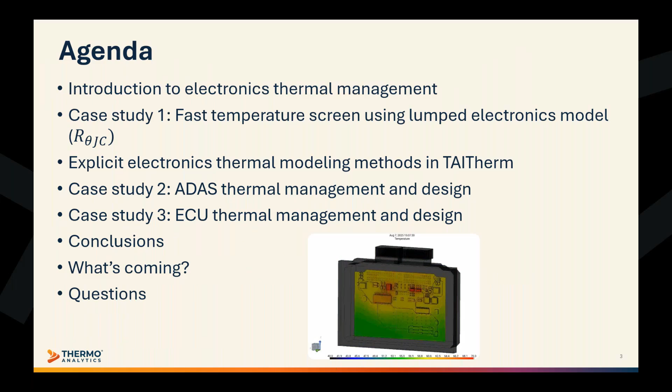So electronics thermal management is critical for a variety of applications, including aerospace, medical devices, commercial devices. But for this webinar, we're going to focus on the automotive applications. And as is often the case, the need for this electronics thermal management and analysis is driven by regulation. And for automotive applications, ISO 26262 is the most critical. ISO 26262 is the functional safety compliance that requires demonstrating that critical ECUs and sensors remain within validated thermal limits, even in extreme environments.

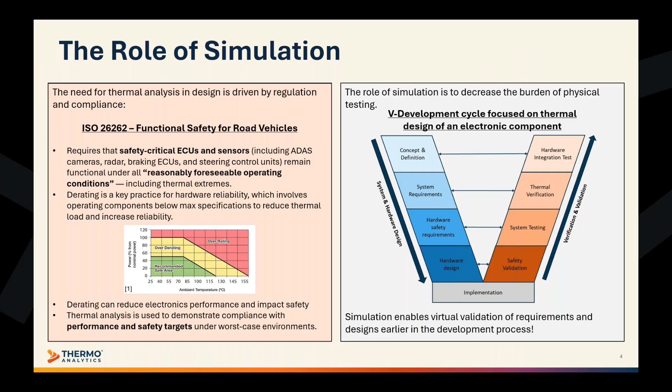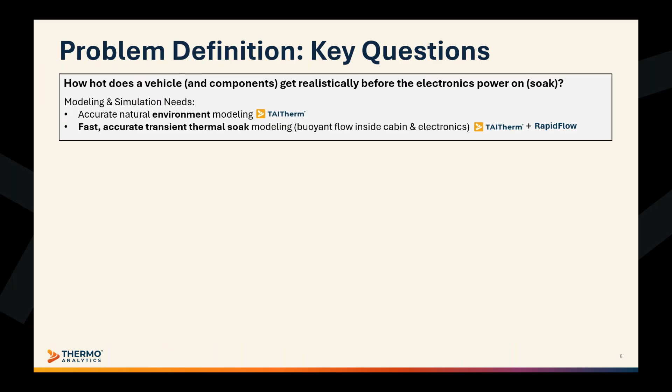And we also want to see how the electronic components heat up during the operation after the vehicle has been turned on and they begin pulling power and producing heat. So these modeling methods include modeling the component heat dissipation over time as they draw power, modeling any heating through the PCB traces, which can be done with Joule heating within TAITherm, and fast, accurate, transient thermal and convection modeling inside the cabin, the HVAC system, and the electronics themselves, and fast, accurate, transient prediction of component temperatures and their derating behavior, which can be done in TAITherm and RapidFlow.

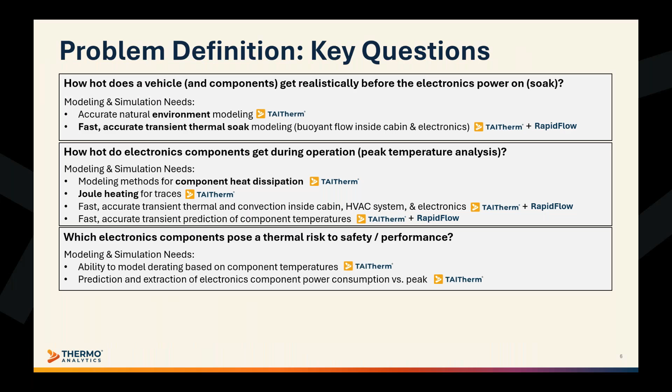We also want to see which of these electronic components pose a thermal risk to safety and performance. So this includes being able to model the derating behavior based on the component temperatures. So how is the power draw being decreased at these high temperatures for these components once they've reached their derating threshold? And then the prediction and extraction of the actual power consumption of the components at those high temperatures versus what they should be pulling in a normal scenario.

And finally, what mitigation strategies can improve the design? So this includes the ability to run quickly with RapidFlow and explore multiple design iterations. We'll see that RapidFlow runs very quickly, which is advantageous for running many quick design iterations. So these are some of the key questions that we're looking to answer, and these are some of the modeling simulation needs and what we can do with them.

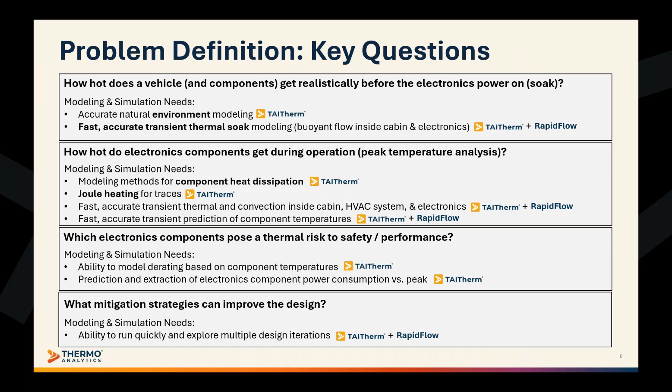So a key enabling technology for this workflow, as mentioned on the previous slide, is RapidFlow. RapidFlow is a transient flow solver completely integrated into TAITherm, and it was released officially last year within TAITherm 2024.2. And it's not necessarily meant as a direct replacement to CFD, rather as a complementary tool to enable fast, transient thermal simulations earlier in the product design process.

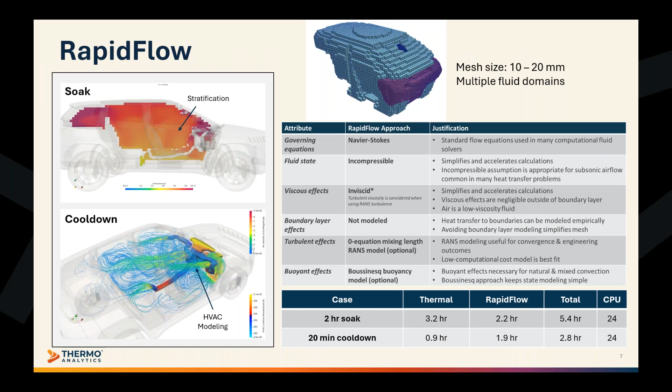So TAITherm has been a strong solution for a long time for thermal soak using fluid nodes. And in this approach, one can prescribe some level of discretization manually, allowing for some simple temperature stratification in the cabin. So you could have multiple fluid nodes, like one at the bottom, one at the top, to get the temperature difference between them. And this approach is the fastest with an estimated runtime of just over 3 hours for this 2-hour soak example. But RapidFlow enables a significant increase in the solution accuracy, predicting temperature stratification, while only increasing the runtime to just a little over 5 hours on the 24 CPUs.

And we can also enable RapidFlow within the ECU and camera components themselves to accurately consider the internal convection. Of course, one could also choose to run the soak with conventional CFD, which generally takes on the order of days rather than a few hours. So there's a few different approaches, but for this one, we're using TAITherm and RapidFlow together.

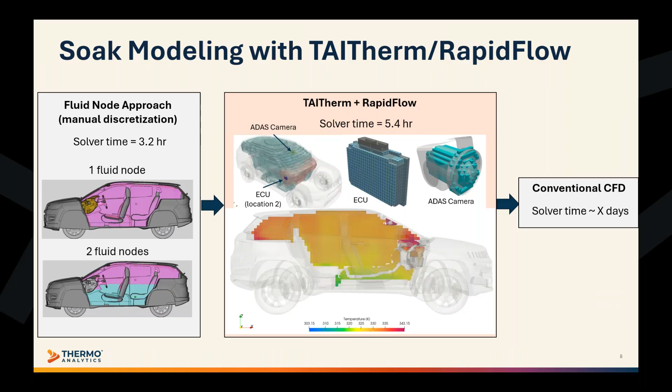For the cooldown, the cabin airflow is modeled using the RapidFlow solver. Cabin air enters through the HVAC vent interfaces and exits the cabin fluid domain through the recirc interface on the HVAC system. The HVAC system flow is modeled using fluid streams just for efficiency, and the RapidFlow air temperature exiting the cabin domain feeds the HVAC fluid stream temperature.

And a PID controller in the evaporator controls the heat rate in the evaporator to target 22 degrees Celsius in the cabin. And the fluid streams through the ductwork then feed the RapidFlow vent temperature inputs. I'll talk more about this at the end, but I'll tease now that local mesh refinement is coming next year for RapidFlow, so a uniform Cartesian grid won't be required. So very soon, resolving the flow through the HVAC system using RapidFlow will be very efficient, and we won't need the fluid streams through the HVAC system.

At this point, I want to dive right into our first case study, which looks at how we can use the component junction to case thermal resistance, the R theta JC, to perform a fast temperature screen and quickly evaluate which electronics modules in the current design iteration pose a performance and safety risk. So the real value here is it provides a means to use the manufacturer data sheets only to estimate the junction temperature from the case temperature.

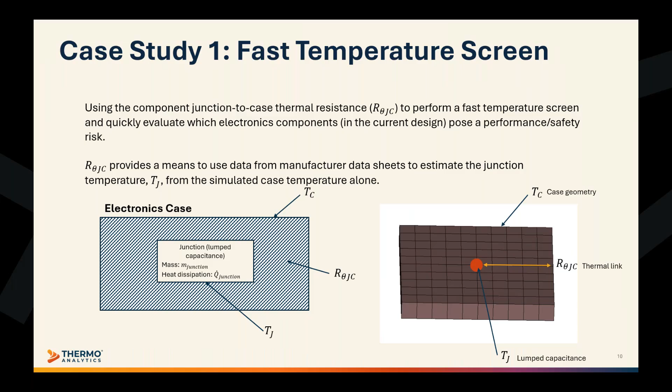So after the soak, the driver re-enters the vehicle and initiates a 20-minute cooldown. During the soak, the safety critical electronics modules and the cabin are warming significantly. It's very hot in this car. And then during the cooldown, these components are powering on, adding additional heat through their power dissipation.

In these case studies, we're interested in an ECU, the electronics control unit, that performs some safety critical operation, located somewhere underneath the dash, and an ADAS camera mounted near the rear view mirror. These components are cooled passively by the HVAC system, so no active cooling. And these components pose the highest risk in the first few minutes directly after powering on. While the cabin air is still cooling down, it might not be able to sufficiently moderate these component temperatures, especially the ADAS camera, as it's getting really, really hot since it's in direct solar radiation.

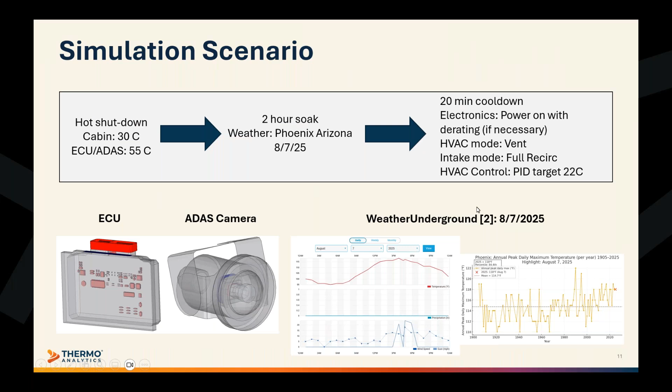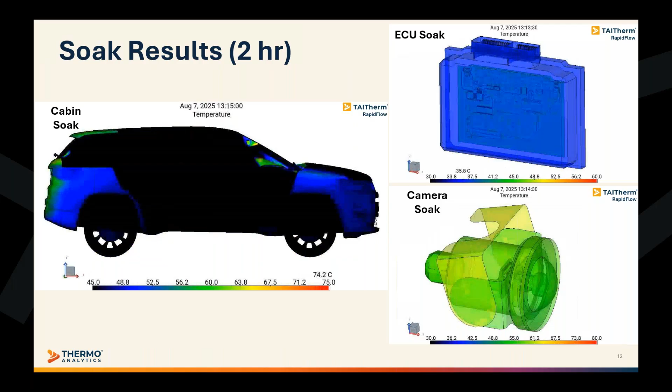In vent mode, the dash vents and rear console vents are active, so you can see those ducts cooling down over time accordingly. And the heat rate is applied in the evaporator, so naturally the HVAC system upstream of the evaporator is much warmer than the active vent ductwork.

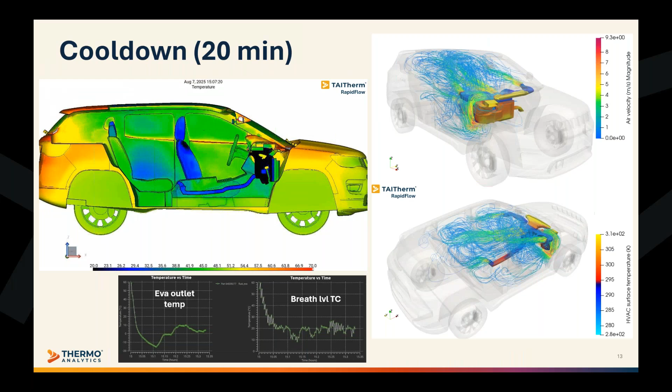And these soak and cool down results that you see are for all the cases. So for this first case with the simple fast temperature screen, to model the electronics components in a simplified way, we got to have the correct material properties.

And the density and specific heat can also be grabbed from the data sheet, or it can be estimated just based on the material of the component itself. And we can add this new material in TAITherm to assign to the electronic component part, to that junction of the component. And that way the part will have the correct thermal resistance for predicting the junction temperature of the component based on the case temperature.

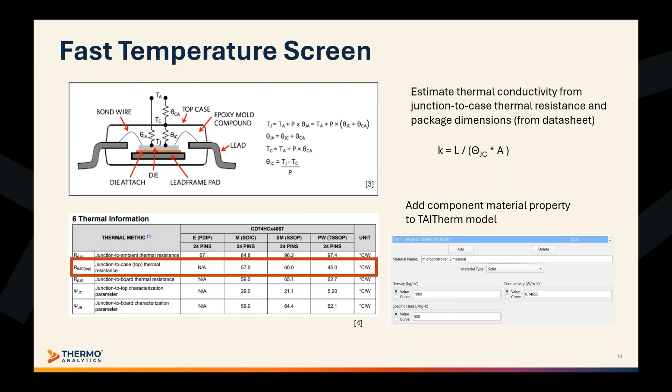And to make it simple, a lumped capacitance part can be created to model the junction of the electronic component inside of the case geometry. So we can set this to use the new material property that we just created, and we can impose heat based on the typical power consumption of the component from the data sheet. So you just add the imposed heat to the junction component.

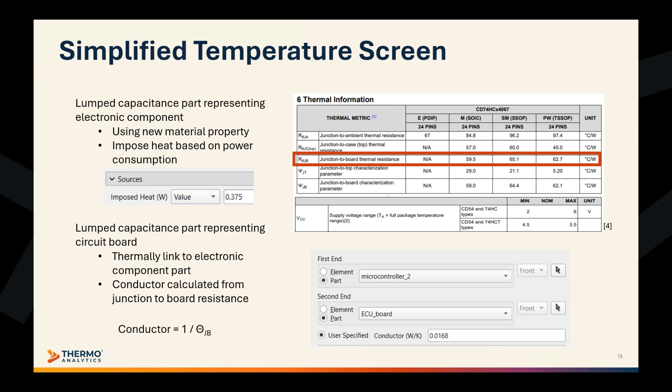And then we can connect the case of the component to the surrounding rapid flow fluid. And in this case, it's super simple. There's no derating or current curves. And the simple setup allows the simulation to run quickly, helps us get a feel for whether these components will work well for this scenario, or if they will have decreased power draw from the high temperatures. And if the initial temperature screen does show that some of them are past their derating threshold, then we can use some more complex modeling to run multiple design iterations to see what can be done.

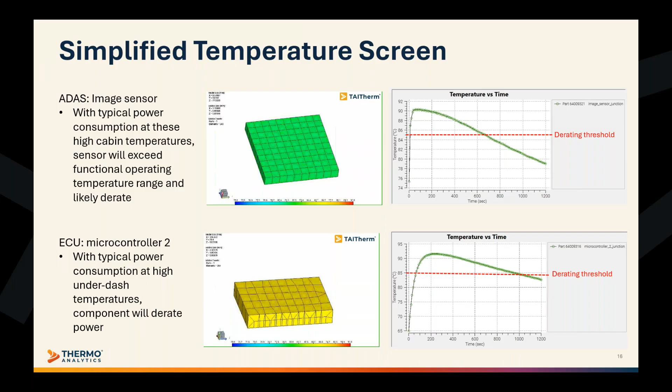So that was the first case study. We showed how we can use the simplified approaches to electronics modeling to perform fast temperature screen for the various electronics components. So once we've identified those problematic components, that image sensor, the microcontroller 2 in the ECU, then we may want to work with suppliers and internal design engineers to identify specific mitigation strategies, such as derating the components, switching out to different components, changing the position of the control units.

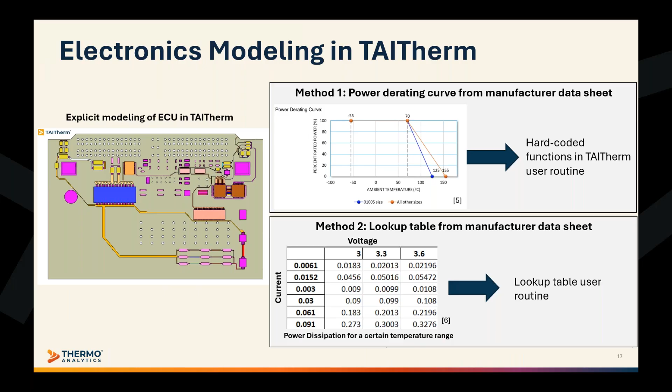And we can also use a second method with lookup tables from a manufacturer datasheet or from your own data that you have on the power dissipation of the component for a specific temperature range. And from there, a user routine can find the current and voltage being used by that component at that time, and then get the correct imposed heat to apply to that component based on also what temperature the component is at that time. So there's a few different ways to apply derating behavior to the components. But for these next cases, we are considering derating.

So we want to make sure that we get the board materials correct as well. And a standard double-sided PCB has 2 layers of conductive copper with a thin layer of solder mask covering them and a thick middle layer of an insulative substrate. So in TAITherm, we can model these layers using copper, FR4 material set to the correct thicknesses, and then a high surface emissivity of 0.9 can be set to the front and back faces to model the thin solder mask layer on the board surface.

And the electronic component material can be chosen to have the same thermal properties as specified by the manufacturer from your own data, like I showed previously in the simple case. And these material properties for the board layers or the components themselves can always be modified to match whatever material is actually being used.

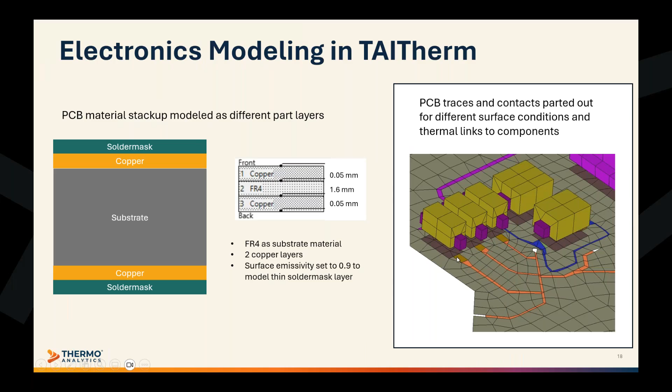And the surfaces of both the component and the board that are in contact with each other, their junctions can be parted out and set to the correct material properties, whether that's copper or lead solder, and then they can be thermally linked together to create conduction between the component and the board. And the junction to board resistance of the component can be used to calculate the conductance of the thermal link. And similarly, the copper traces on the surface of the board can be parted out and have the correct material properties, so they have the copper surface instead of a solder mask surface.

So in the second case study, we're looking at how we can use this simulation workflow for advanced driver assistance system camera design. Here we're comparing the derating performance of two image sensors, which is one of the most temperature sensitive and impactful components on the camera performance. And we saw from the simplified temperature screen that it's getting really hot, and it is past its derating threshold. So when an image sensor is thermally derated, the image sensor frame rate can be reduced, which can cause latency, delays in detection, and pedestrian recognition, which can obviously have serious safety implications.

So we're looking at performance and safety for these two image sensors, and both are low power CMOS image sensors designed for automotive applications. The first is an image sensor from ON Semi, which has an operating temperature range from -40°C to 105°C, but it's actually only functional up to 85°C. And the manufacturer recommends not using the sensors above 85°C as it reduces the image quality pretty drastically. So the typical power consumption of this device is around 290 milliwatts, depending on the ambient light conditions.

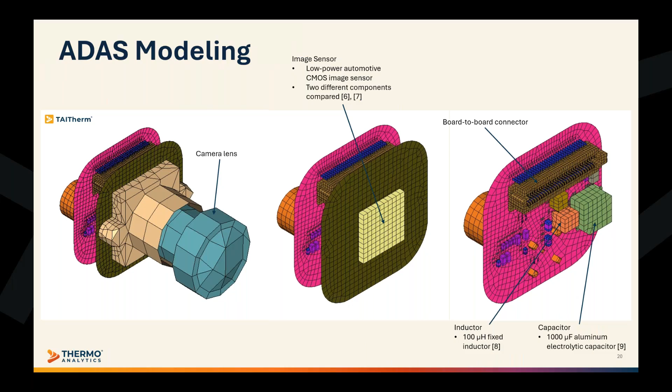So if a component reaches the derating threshold specified in the datasheet or based on the operating temperature range, then the power dissipation will decrease by a certain percentage based on how hot it is. And this model geometry doesn't have any traces, but we assume that they would have little thermal effect on the more important components.

And here we see the results of the two different image sensor components. So the components in the ADAS system start very hot. They start at around 75°C, and they heat up as the electronics begin operation. We see that both image sensors surpass their derating thresholds, which were the same, 85°C. But the second image sensor actually reached higher temperatures.

And even though that second image sensor does draw less power, it heats up more than the first image sensor because of its smaller size. And the smaller component has less surface area for the heat to dissipate through convection to the surrounding air, so it ends up holding onto the heat, and the junction temperature is about a couple degrees higher than image sensor 1.

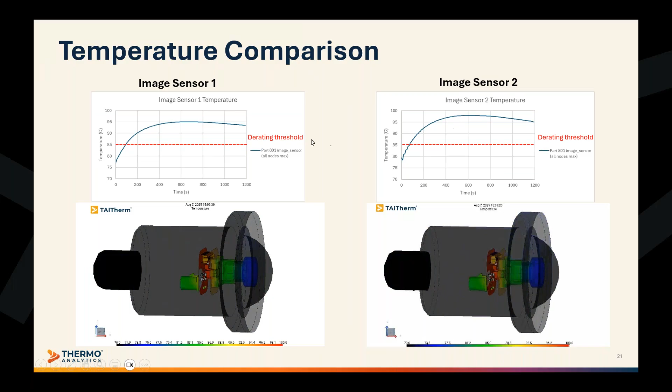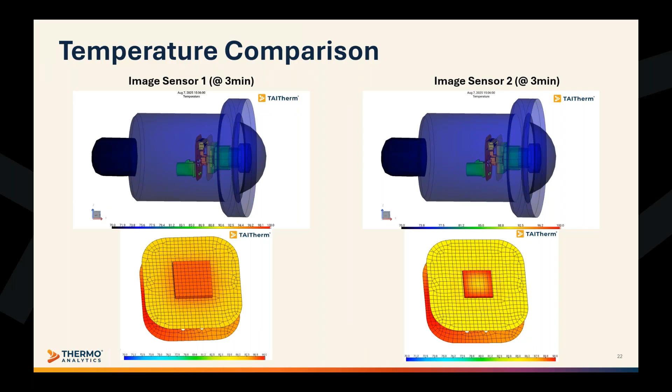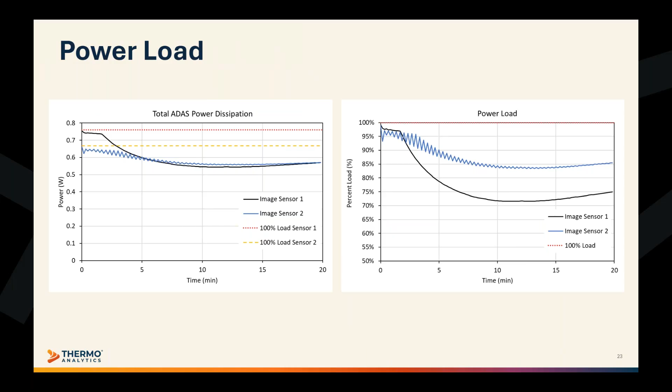So in this next case study, we're comparing the effect of the location of the ECU under the dash on thermal performance of the electronics module. We saw that some of the microcontrollers in the electronics module are at risk of derating, and we can see how that compares based on where the module is actually located under the dash. So this type of study can be done very quickly in TAITherm, requiring just a simple geometry translation in the TAITherm GUI or an external tool.

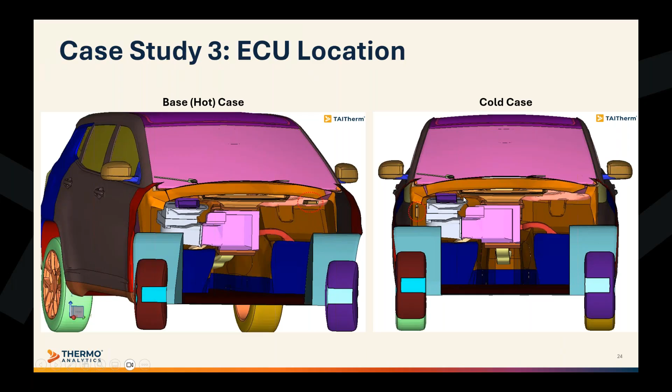And the less influential passive components, like resistors, are also modeled using a user routine based on their power dissipation and derating behavior. So again, derating was considered in this model. So if they reach their derating threshold, they'll reduce their power draw by a certain percentage. And some of those key components that we saw in the simplified temperature screen are microcontrollers 2 and 3, as they were much higher than their derating threshold temperature.

And the heat created by current moving through the PCB traces was also modeled in this case using the Joule heating feature within TAITherm. This feature uses a script that calculates the localized heating of a trace or a bus bar based on the current or voltage drop between the trace terminals. So there's different terminals connecting to the components, to the traces, and then to the next components, and that difference in voltage or the current going through it allows us to calculate the heat of those traces.

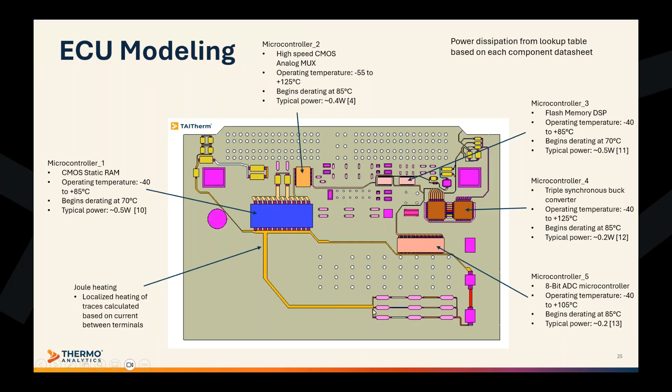So this change in location, moving it closer to the recirc intake, had a significant effect on the peak junction temperature for these microcontrollers in the ECU. So we would expect much better performance from this control unit being in a more passively cooled region.

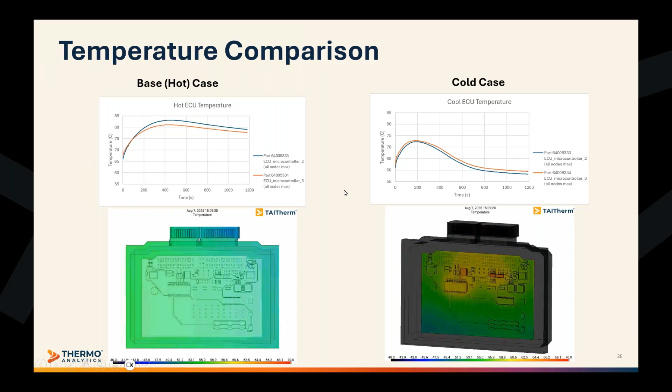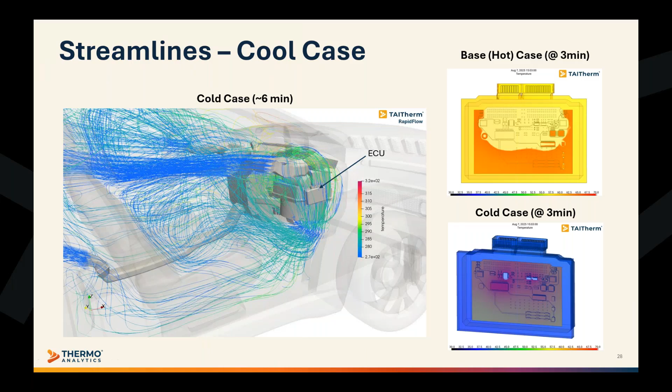And assessing the impact on safety is a bit more nuanced. It really depends on the nature and the function of the ECU. That being said, it's definitely possible that safety objectives are at risk of being compromised at this degree of derating for this ECU module, for example, due to reduced data processing speeds or latency. So pretty drastic difference between these two cases.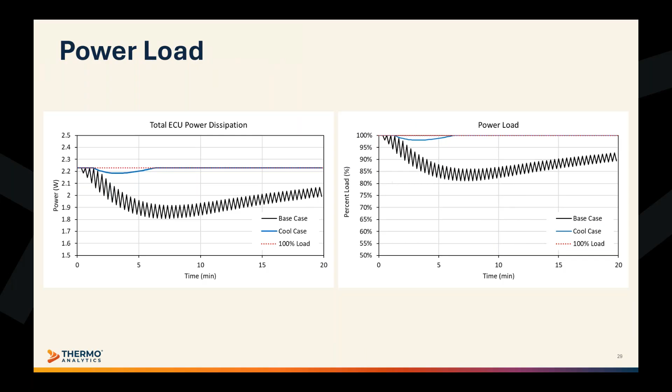So in conclusion, TAITherm and RapidFlow enable a unique simulation workflow for electronics thermal management, able to model the buoyant flow physics and the HVAC flow and cabin cooldown. We also see that a simple lumped capacitance approach using the junction to case thermal resistance from manufacturer datasheets can be used to identify which electronics may pose a performance or safety risk. And then we can model those high-risk components explicitly within TAITherm to see their heat dissipation and derating behavior.

And this proposed simulation workflow can be used to evaluate the ECU ADAS performance in detail and perform rapid design studies. The short runtime that RapidFlow allows can let you run the full soak and cooldown model in only about 6 to 7 hours. So you could run this full soak and cooldown iteration about one per day, which is pretty remarkable. So it allows for fast design iterations.

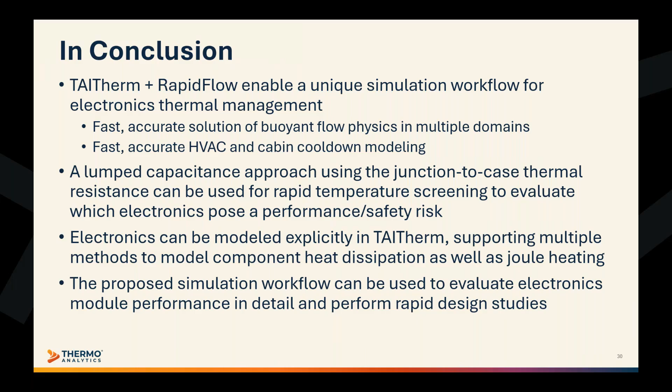And finally, I wanted to highlight some advanced features within RapidFlow. Coming soon in 2026, moisture tracking and moisture transport will be available within RapidFlow. And this can allow us to predict fogging on the ADAS camera films, which is commonly reported as an issue. And this can also impact performance of the camera.

And also coming in 2026 is local mesh refinement. And this will enable efficient modeling of the HVAC internal flow field. So like I said, in these cases, to speed up runtime, we use fluid streams inside the HVAC ducts to model the airflow in them. But with local mesh refinement, it will be possible to efficiently use RapidFlow to model the air in those ducts as well as in the cabin.

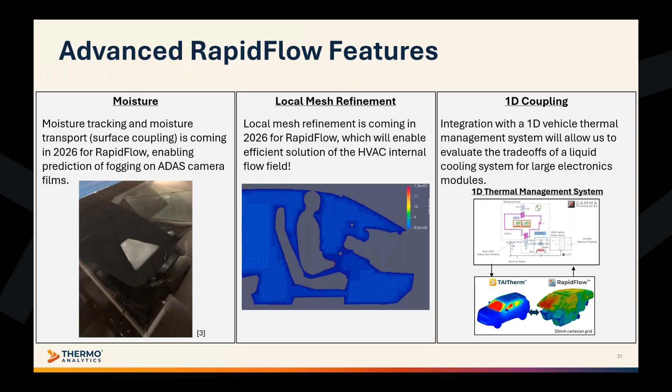And 1D coupling with RapidFlow is already available. It's possible to integrate a 1D vehicle thermal management system that can help evaluate liquid cooling systems for larger electronics modules. So there's lots more to come and many cool features that are already available that can allow for more advanced design iterations for electronics thermal modeling.